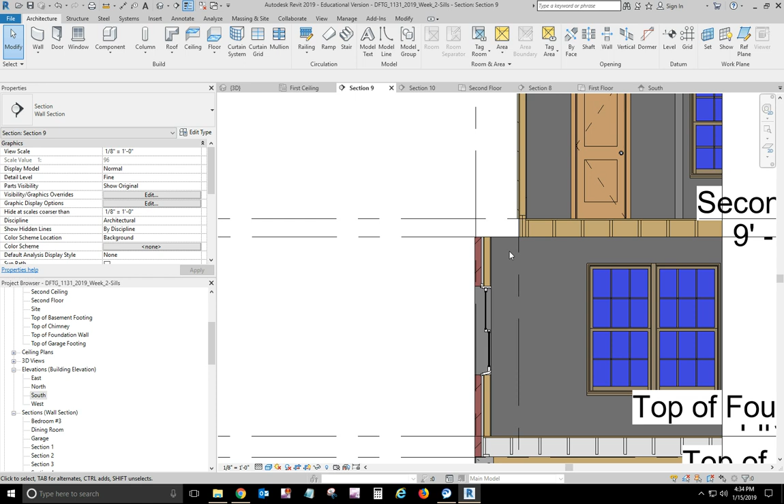Okay, so after you get your joist in and check all the ends and all that kind of stuff, you're going to apply your 3/4 inch plywood floor.

And this is the west side wall where those two microlam beams are. See the plywood is on top of the joist, but it comes over and stops at the edge of the microlam. Okay, so check that thing.

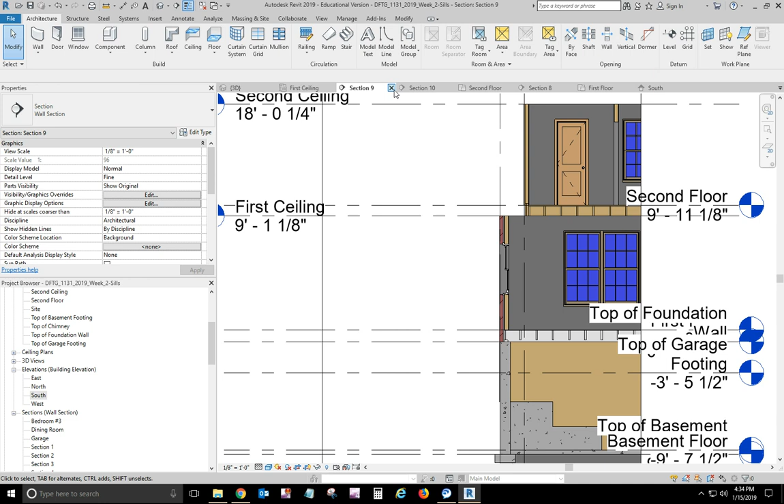Yeah, I don't think I need that there.

Okay, so what we want to do now is out here in the front, we've got this little decorative wall right here.

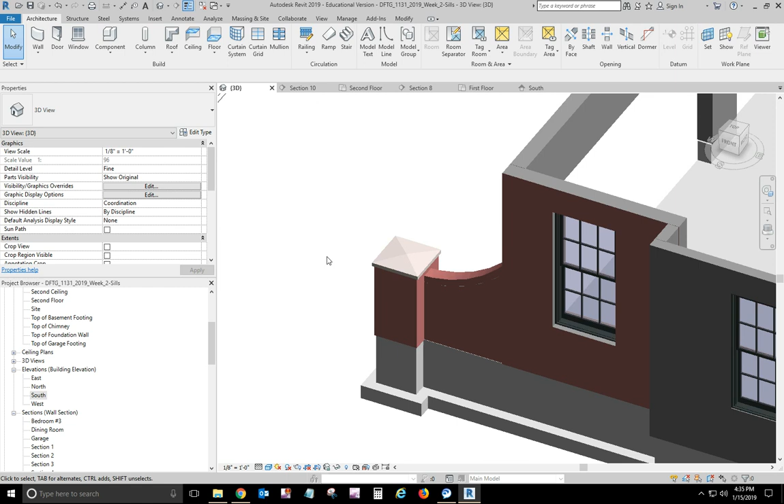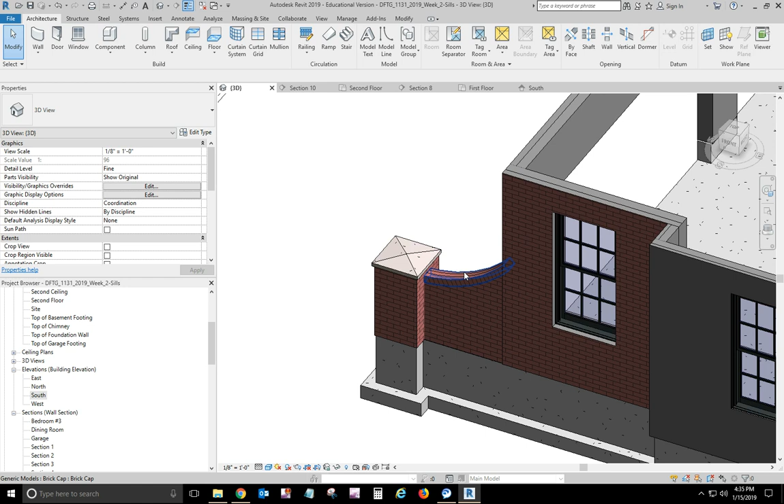Okay, and since on our house our brick overhangs a little bit, we kind of want to match that, working our way around, but it's just not going to be perfect because our bricks are only 7 5/8 long. And we've got this cap here. Anyway, so here's what you need to do.

Let me hide some stuff. Okay, I'm going to hide all of those.

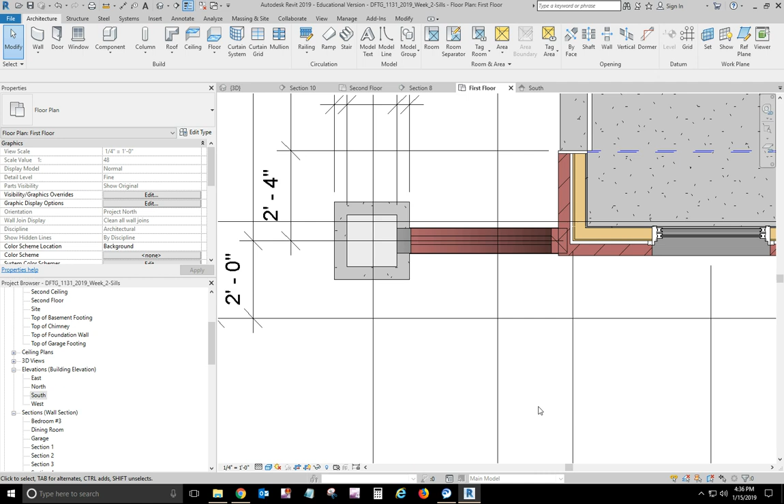All right, so I made this wall. Oh, that's a sweep on the top. So let me hide the sweep.

Okay, here we have a brick wall. I made a double brick wall. It's basically 2 layers of brick in the core with a 3/8 of an inch air layer between them, which gives me a 7 5/8 thick wall, which is the length of the brick that's going to go on the top.

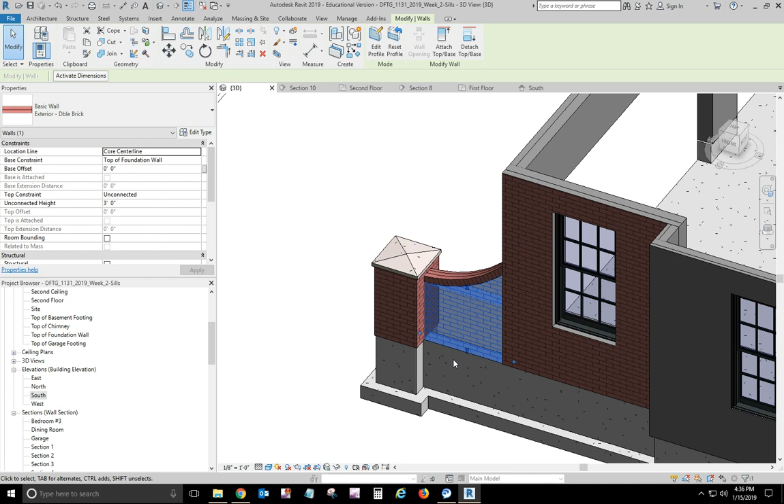Okay, so you want to make this wall, and then you're going to put it right across here. We're going to, you can center it on the concrete below, or you could flush it with the outside edge of this. I really don't care either way. Okay, I did mine centered on this wall.

Next, I came right here and I made another wall type. It's a double CMU. Same kind of a thing, but I used 2 layers of concrete masonry units, which are 7 5/8 wide or thick. And we're going to lay these things, they're just going to be 16 inches long. But I told it 16 inches because that's the total thickness of my wall.

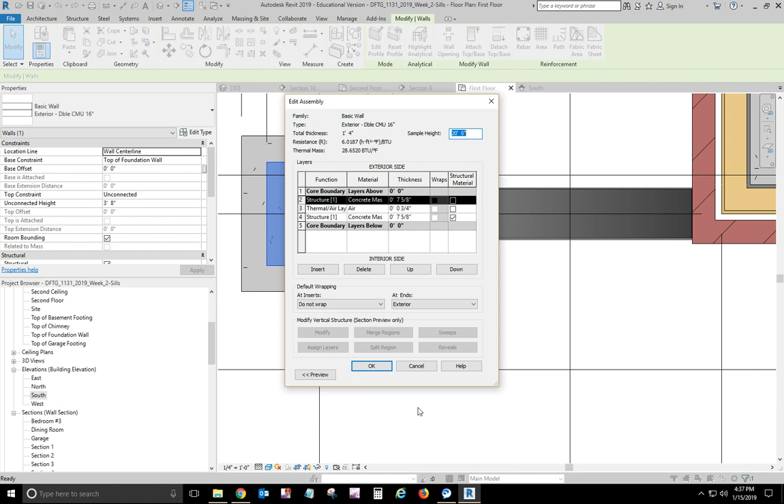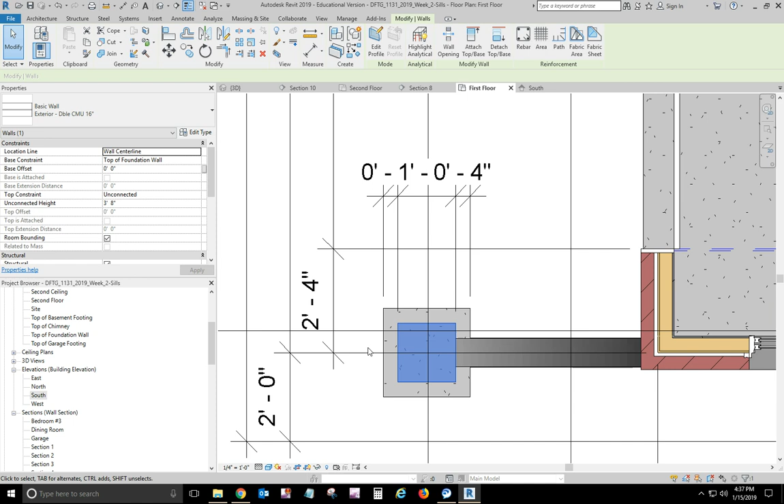Okay, so you want to make one of those, and these are on top of the foundation wall layer or level, sorry. So you're going to draw one that's 16 inches long, and I constrained it to the center of the footing along this path here, and then I dimensioned it across and locked it in place.

Then create you another brick wall. Um, geez, how can I?

Okay, then I created another brick wall. It's a single layer of brick, and all it is a 3 5/8 layer of brick.

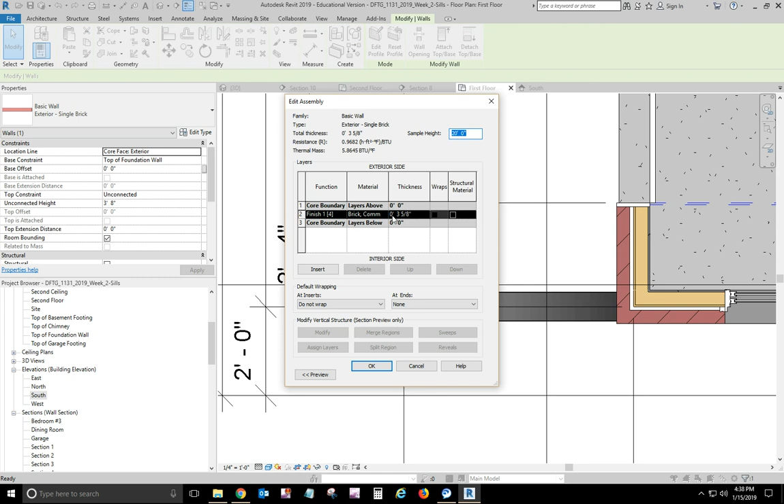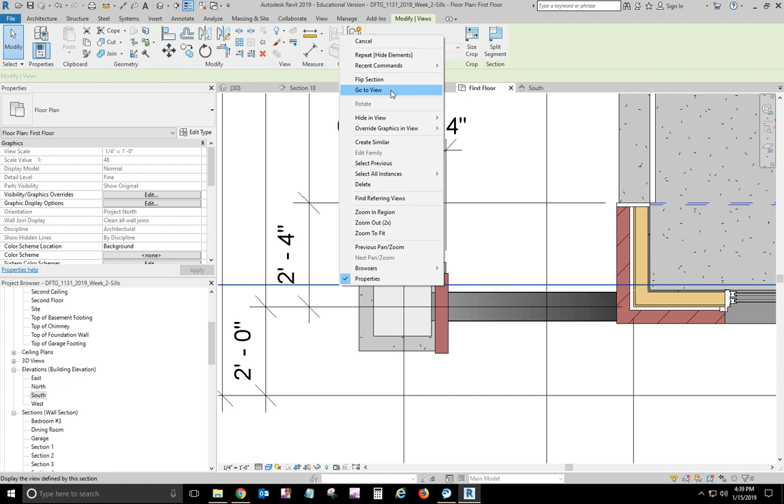And then draw it. Don't try to match it up with the footing or the block or anything like that yet. Draw it all the way around and then pull it into a section view and dimension it. I gave it a 5/8 inch overhang on all 4 sides of the concrete.

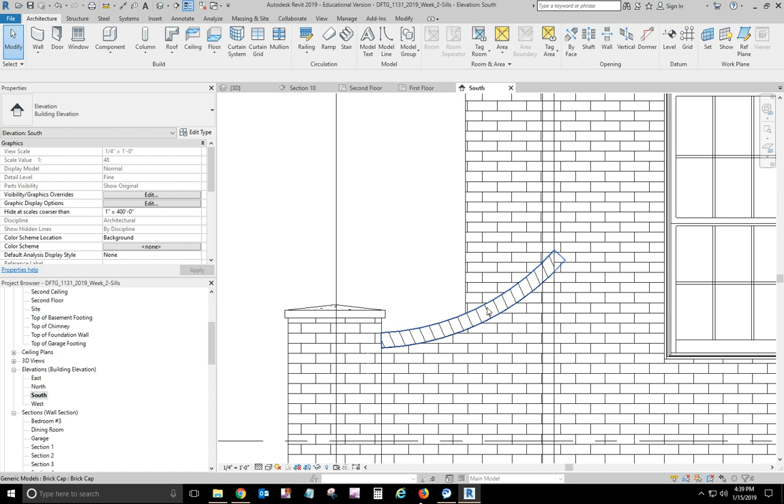Okay, and let's look at this profile. All right, now when you make this wall, the dimensions in the drawing show it at 3'4" tall and then 5 feet tall. But you want to take 4 inches down from that because we're going to put a layer of brick across the top of it. So make this wall 3 foot tall.

And then you're going to go edit profile, boom. And what I did basically is I did some offset lines and I drew a circle that has a radius of 6 foot.

I copied this up 6 feet so I could center my circle on that. Then I copied that up a couple of feet, 4 feet 8 inches from here to give me that.

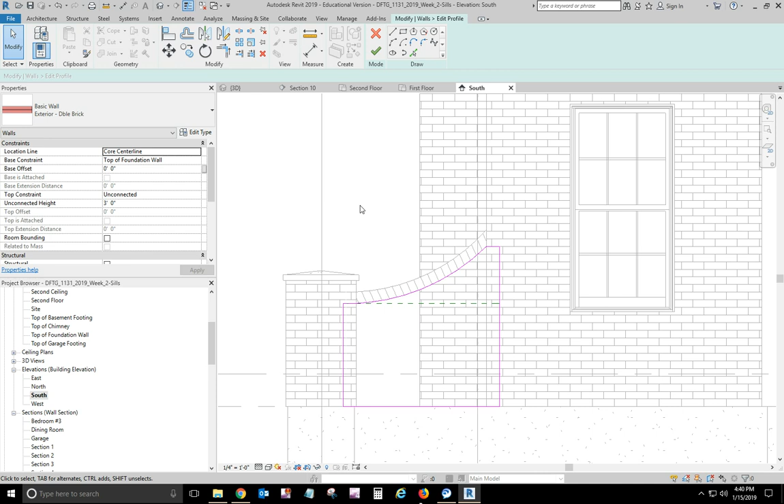And then I trim the lines out and so forth, and finished up the profile. If you're getting some errors, it could be this wall. When it was created, the tops need to be locked.

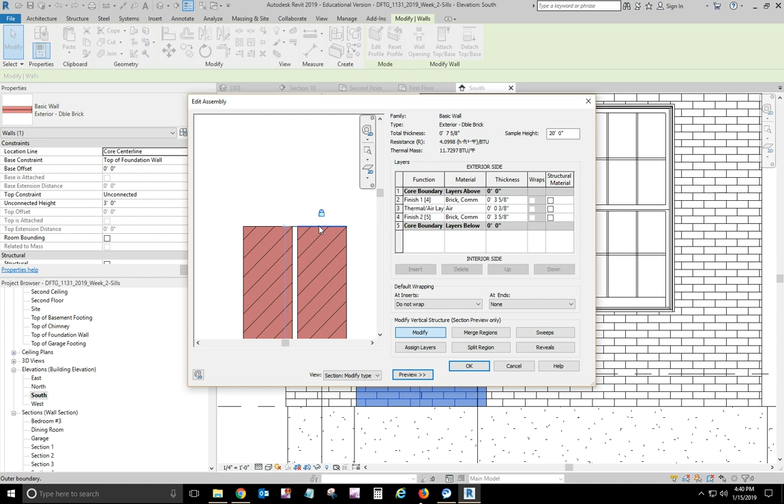So both of these layers need to be locked together. That was one of the problems that I was having.

And sometimes you can see the wall extends into the ceiling. It's just kind of weird the way it was working out, but you just make it work, okay?

So you edit the profile, and then what I did is I modeled in place a sweep on top of that, and I made it...

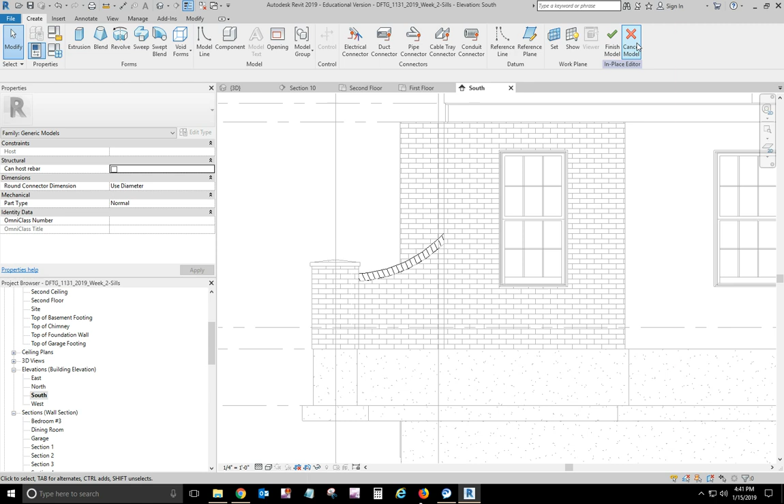Well, that was kind of weird the way that popped up. It's kind of weird that it's coming up. Oh, there we go.

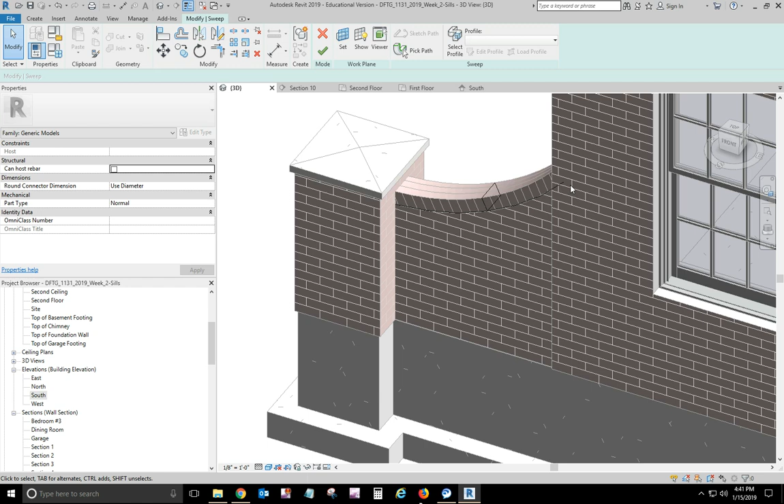Edit the sweep. I chose the path across there, and you'll have to adjust the path so that it actually starts on this part of the wall, and it'll extend up into this wall a little bit.

Come on, model. It'll extend up into this wall so that the top of the brick kind of joins into it.

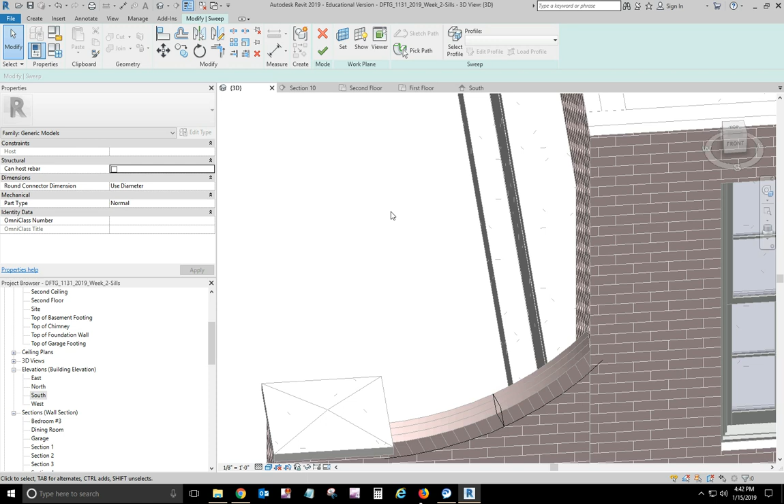And then I sketched a profile, 4 inches tall, 7 5/8 long. And then I did the sweep.

And I applied a brick rowlock pattern material type to it. It doesn't look exactly like it's supposed to, but it looks pretty close.

All right, now the cap right here - this is the concrete floor. I created a floor type and called it a precast cap. I made it concrete precast, 1 inch thick.

Excuse me, 2 inches thick. And I checked it to make it variable so you can kind of adjust it easily.

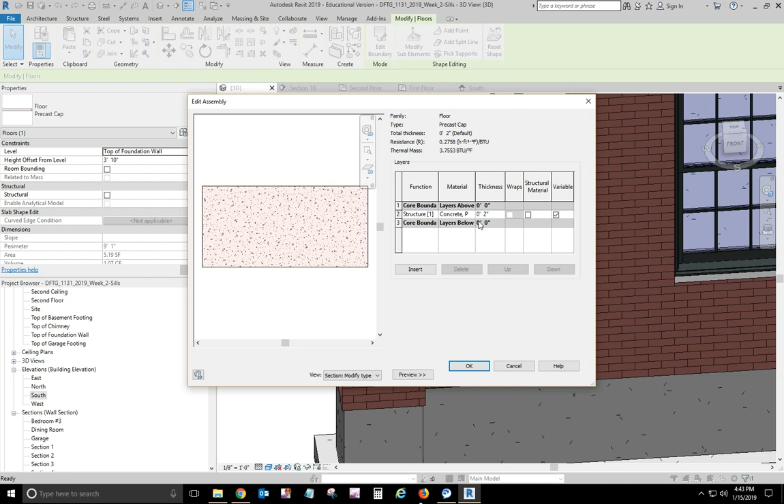And I drew it on top of that, or on the first floor. I've got it turned off here - let me pull it back up.

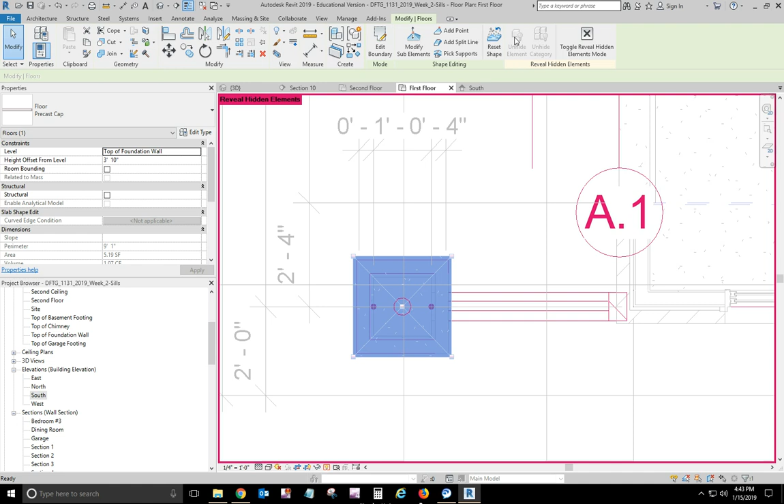So I drew it in place and then dimensioned it to get it like an inch larger than the brick so that I've got some overhang.

And you got to remember your offset so that you get it at the right height. And then in your profile here, after you've created it, you can come in and go add point.

And then what I did is I found the center point of this thing, and I made it 1 inch to start with. I think I changed it to 1.5 inches, maybe 2 inches.

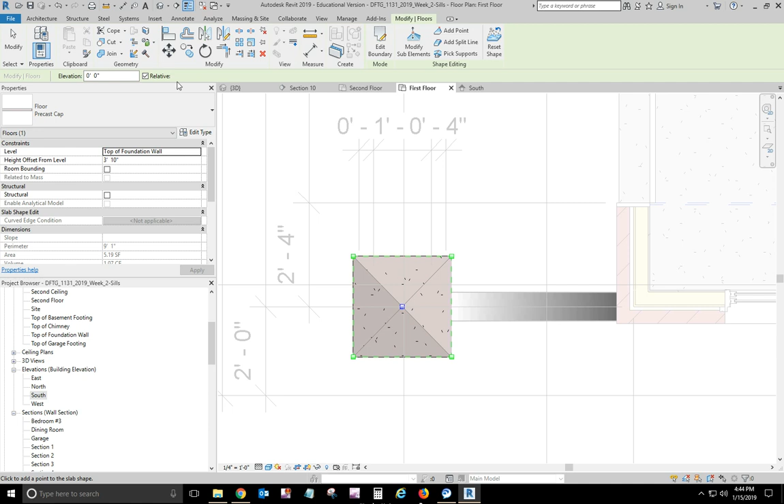But you click a point right there and you can change the elevation of it, and you can raise those things up. And if you need to come back and change that, you can click that and go modify sub elements, and grab that point and pull it.

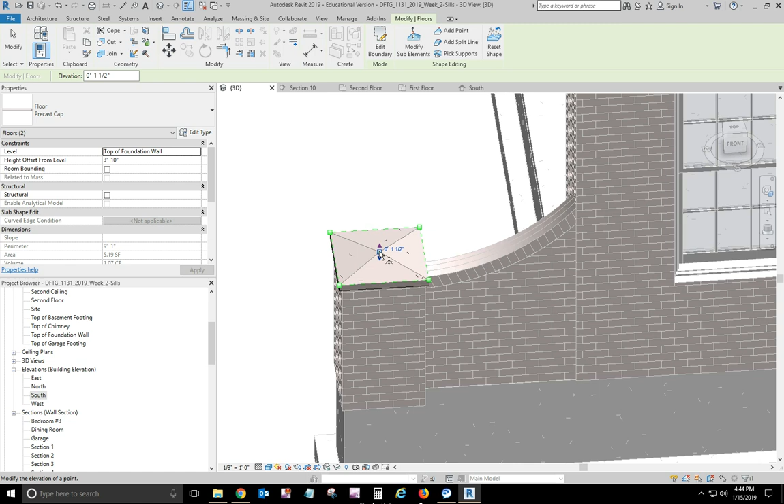Let's see. Okay, so I made it 1.5 inches taller than the perimeter of it. If you run into problems, you can always hit reset shape.

And so that makes it look pretty close to what it shows in the drawings there. So that's those things.

You'll catch up with that, and then I will come back with another video of the next steps we're going to do.